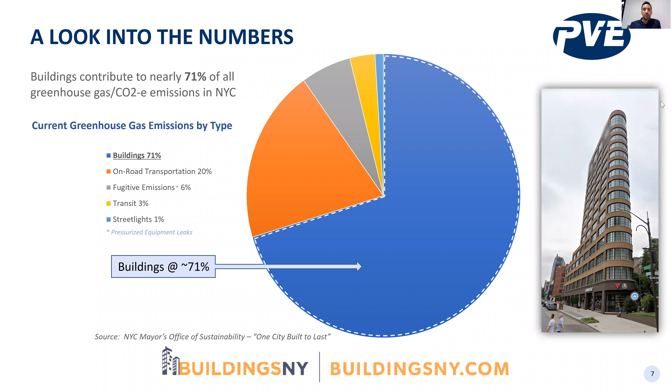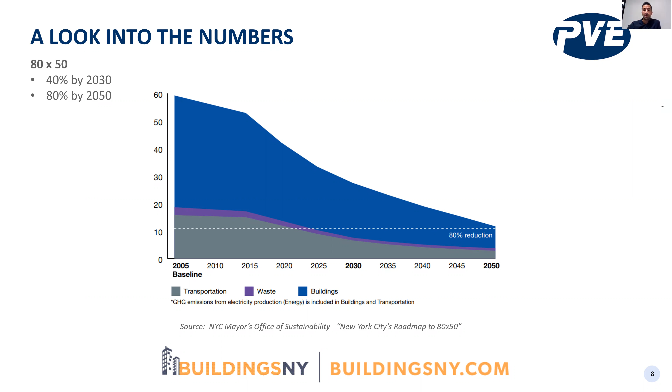And what does that really look like from now, 2020 until 2050? So really, the reduction comes from a 2005 baseline study that New York City carried out on its buildings, and then used that to look towards the future and say, this is the target we need to meet. So again, it's requiring the whole collective average of New York City to reduce its emissions across all sectors by 40% by 2030,

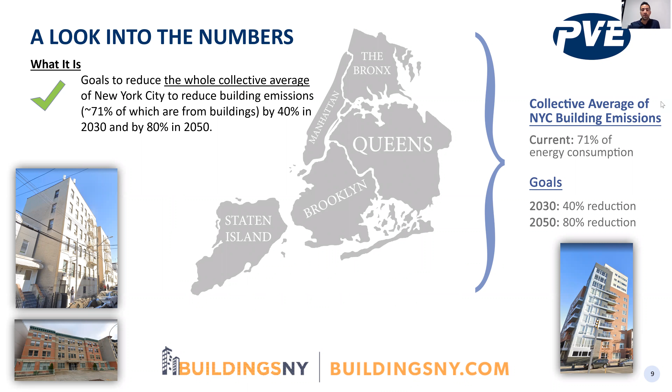80% by 2050. What the local law isn't: it does not require each and every building to reduce by the same amount. It doesn't require every building to reduce 40% by 2030 and 80% by 2050. The idea is that certain buildings that are really good performers don't have to take such drastic measures as those that are bad performers. So really, the law is going to be felt by the 25% or so buildings that are the worst performers out of the bunch.

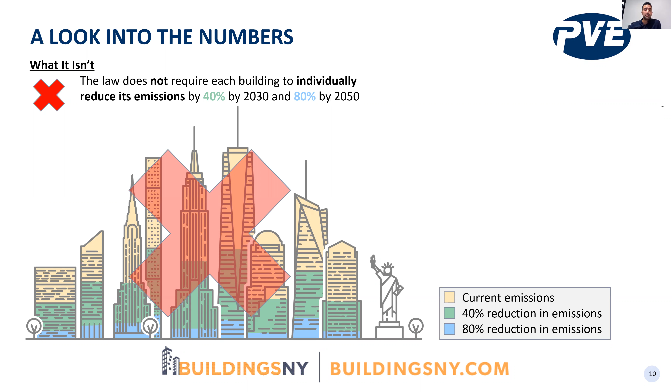And then as the limits get stricter and stricter, when 2030 hits, 2035 hits, then more of the buildings will come into the fold and thus be required to reduce their emissions. So what does that mean? I mean, there's several different types of buildings. Energy Star Portfolio Manager recognizes several dozens of different types of building sectors. But what does Local Law 97 recognize?

So it gets as granular right now as 15 different space types. And you're looking at them right here. They're assembly, business as an accessory to healthcare facilities, education, factory, high hazards, 4 types of institutions, mercantile, 2 types of residentials, storage, and then utility/miscellaneous, which can go into several different categories. For those of you who are familiar with energy benchmarking using Energy Star Portfolio Manager, again, as mentioned before, that has several dozen types of categories.

And something I'll get into later in this presentation is that the rules around which Local Law 97 will be enforced have not been identified and formulated yet. It's going to be another few years until RCNY rules are out there that really dictate the way with which Local Law 97 is implemented, the format of everything, the process of everything, but the spirit of Local Law 97 is in its language right now.

So one of those rules that has yet to be developed is, how does Energy Star, with its several more categories, translate into these 15 categories? So that has yet still to be determined, but with some just general logic, you can look at one use and look at another. So, you can talk with your benchmarker or other energy or building consultants to help you identify which use is more suitable for your building.

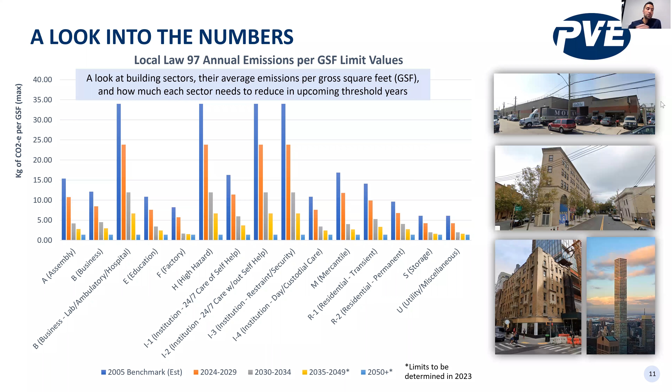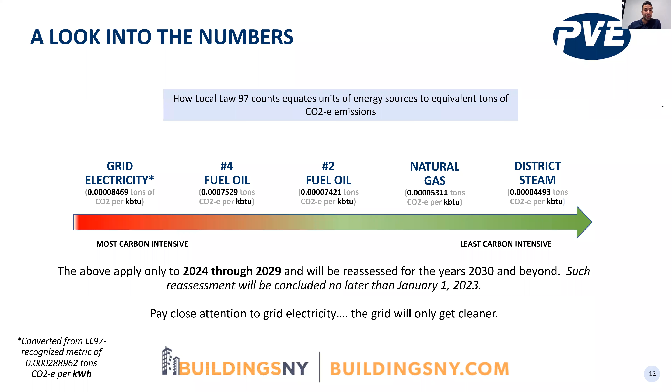And to look at it even more granularly, how are GHGs, or greenhouse gases, calculated? It's according to certain sources. So right now, Local Law 97 identifies 5 main utility sources: grid electricity, number 4 fuel oil, number 2 fuel oil, natural gas, and district steam. So at the moment, they only have coefficients, if you will, that multiply a unit of each one of these utilities and sources to an equivalent ton of CO2.

And right now, as it stands, grid electricity is the most carbon intensive, with district steam being the least carbon intensive. And most of these line up with the coefficients identified by EPA, though these coefficients are more representative of the cleanliness of the infrastructure and the systems that distribute these fuels, and of the plants and the origins where these fuels are produced. So right now, 2024 through 2029 attribute these values to it.

So even though grid electricity is the most carbon intensive at the moment, pay really close attention to this, because power plants around Zone J and New York City and New York State are going to get progressively greener. The electric grid is going to be progressively cleaner in general. So we're going to see a lot of substantial decreases in these coefficients in years to come, potentially for grid electricity to slide over to the right.

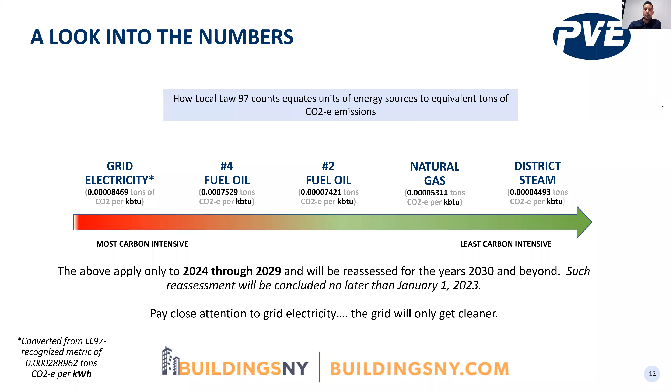So the metric that Local Law 97 recognizes are tons of CO2, and the limits that it attributes to certain building types are on a square foot basis. So for the sake of saving yourselves a bunch of zeros and decimal points, we're just converting in this bar graph tons to kilograms. A metric ton is the unit of measurement used to quantify CO2 emissions from buildings. 1 metric ton equals approximately 2,200 pounds or 1,000 kilograms. So we'll just do one easy 1 to 1,000.

And then carbon dioxide equivalent, or CO2e, is the number of metric tons of CO2 with the same global warming potential as 1 metric ton of an equivalent greenhouse gas. And then what you see here is Local Law 97's expectation for residential buildings and their properties to be at. So if you're a building that's 100,000 square feet, you need to multiply that by 6.75 to get your annual limit of how many kilograms of CO2 you're allowed to emit. So 6.75 times 100,000, 675,000 kilograms per year.

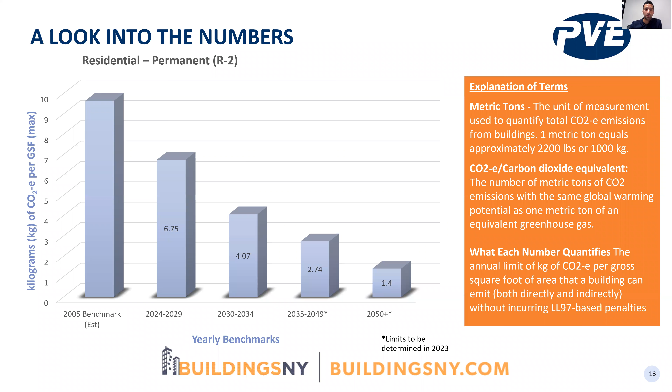So, let's see. Those should be elsewhere, pardon me. So you'll be seeing those bar graphs later in the slides.

So let's do an example here, just a very simple basic calculation. Let's assume that this is a simple building, purely residential, one use type, and that its gross square feet is about 130,000 square feet. And just to note, the square footage used for this law is that recognized by the Department of Finance of New York City. So with 130,000 square feet of purely multifamily residential, that being R2, let's assume that the latest benchmarked greenhouse gas emissions for this building was 573.4 tons of CO2e.

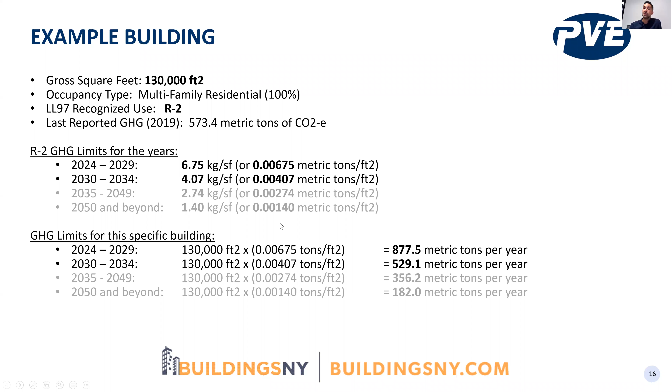So now the values that I showed you in the earlier bar graph, such as 6.75 kilograms, can be converted to metric tons. So for the sake of matching up with values that the law recognizes, let's use these values over here. Then you multiply these coefficients times the square footage down here, and you'll get how many tons of CO2 your building is allowed to emit. Again, these ones are grayed out because those limits have yet to be defined, but we've estimated them for the time being.

Then you take the actual tons that your building last reported, let's assume in 2019, and you take the difference between that and the respective allowable limits for these years, and then you'll see the delta between what your building emitted and what it's allowed to emit. Now keep in mind, we're only basing this off of the latest data available to us, that being what a building emitted in 2019.

When we get to these years, what they're going to care about is that year and nothing else. They're not going to take the limits in 2027 and apply that to what your building emitted in 2019. They're going to care about what's the limit in this year and what you emitted last year. They want to see proof, actual data of what you do in real time in that year.

So in this example, in the first range of years, 2024 to 2029, this building is well under the limit. Therefore, there's no penalty. It complies with Local Law 97. However, as we get to stricter years, this and many other buildings out there are going to see themselves really close to this limit or way over it. So in this case, it's 44.3 tons over the limit.

And when you account the penalty that Local Law 97 says, 44.3 tons times the penalty of, get this, $268 per ton over the limit, then you will be subject to penalties of five digits, $11,872 every year. And then as the limits get even stricter, your fines are going to be even more.

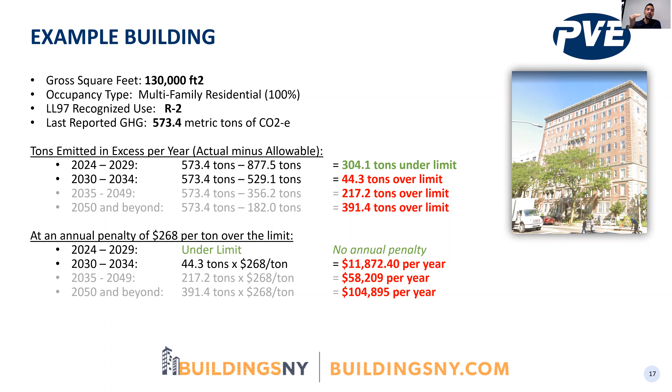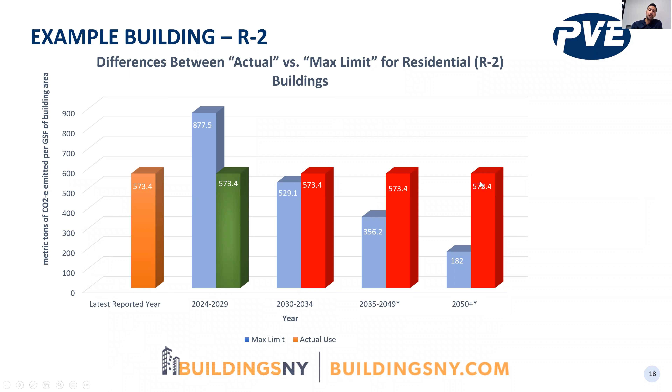So you account this for several years in a row, and then for another 5 years later, your penalty will only get stricter. You've got a long pathway of money that you're going to have to fork over later if you don't invest now in capital improvements to make sure that your emissions are lower now. So this is sort of a graphical representation of that. Green when you're below the limit, red when you're above the limit. So that delta is what you're going to be paying for in penalties. And just a graphical representation of the annual penalty that you would pay in that example.

So that was a rundown of simple calculations for a building that is assumed to comply, no special criteria, no special exemptions, but obviously this law goes beyond just simple basic calculations. That's why we're here to present this to you, because there are pathways to determine whether your building actually complies, is exempt from reducing its emissions, or whether the law applies to your building whatsoever. So let's go through that. These following pages will help you determine the answers to those questions and guide you through the next steps.

So there's going to be a few terms that I'll throw around here and definitions I'd like to relay. For those of you who aren't familiar with what benchmarking is, it's an activity that has been stipulated by Local Law 84 and 133 to annually report energy, water, and greenhouse gases that a building is responsible for consuming and emitting over the course of the calendar year. These are usually handled by a combination of building ownership and professional engineers who submit reports to memorialize to the City of New York how much water it consumes, how much energy it consumes, its square footage, and then this data is all publicly available on New York City's open data website. Penalty assessments, and that's what I just did with that sample building earlier.

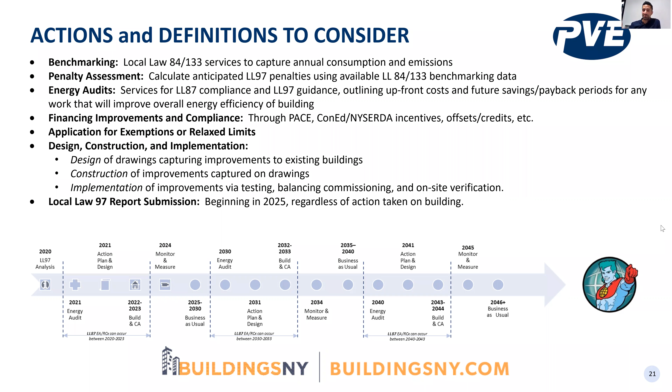So these are just several of many other things that constitute a long-term action plan when it comes to seeing your building's pathway towards Local Law 97 from now until 2050. And your building will progressively become leaner, stronger, and much more energy efficient as it channels its inner Captain Planet or Admiral Atmosphere, whatever you want to call them.

So I understand this content has been quite verbose, as is the law itself, but we put together a decision flow diagram that helps make a bit more sense of Local Law 97 and how you go through this and figure out, does my building need to comply? Do I even need to care about this law? Or can I go through alternate compliance methods in order to comply?

So let's go to the beginning. First question is, how many buildings are on the tax lot? Okay, let's assume that it's just one for now. Next, is your building over 25,000 gross square feet? Let's say no. That's easy. You don't have to comply.

And we don't know exactly if buildings have to submit annual reports saying, I'm a small building, I therefore don't need to comply. There's a good chance, the way that Local Law 84 and Local Law 87 rules are written right now, they usually upload a spreadsheet every year saying these are the buildings that need to comply. So the city has done a bit of homework to say, we know which buildings are exempt. So if you don't see yourself on this list, don't worry about it.

But again, there are still rules that have yet to be developed where we'll have to figure out how this is recognized. But in any case, let's assume that the building is over 25,000 gross square feet. Okay, so is this building that is of the appropriate size a covered building per the Local Law 97 definition? This is a very important facet of the law.

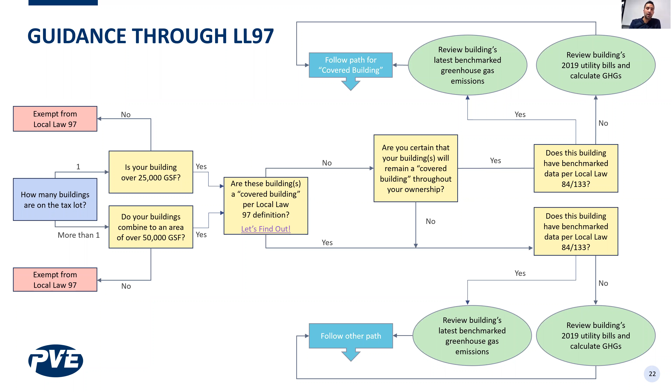Essentially, a covered building, as it's defined in this law, is a building that is required to comply by reducing its emissions below the respective limits. However, if your building is not a covered building, you don't have to reduce your emissions, but you still have to comply. You don't necessarily have to take drastic measures to lower your emissions, but you are still required to perform routine maintenance and prescriptive commissioning measures on your building systems and report such activity to the New York City Department of Buildings. So we're going to cover those definitions next.

So right now, the law as it's written recognizes 7 different types of buildings as non-covered buildings. Those are an industrial facility primarily for electric power or steam generation; real property of not more than 3 stories of semi-attached or attached dwellings, basically small residential properties; any city buildings, though they are being held to different standards for energy reduction; and housing developments or buildings on land owned by NYCHA.

For residential buildings, a rent-regulated accommodation is not considered a covered building. But an important piece of legislation to keep an eye on is 1947. Right now, Local Law 97 recognizes a building that has 1 unit rent regulated as the whole building being rent regulated. So even if a building has 20 units or 200 units, if only 1 unit is rent regulated, the whole building is defined as rent regulated in the eyes of this law. However, this bill could increase that requirement from 1 unit to 35% of all units in the building.

This bill had a hearing a few weeks ago, so we're keeping a close eye on it, as that will certainly shift the landscape of which buildings need to comply, which need to reduce their emissions, and which need to take prescriptive measures. The 6th definition is any place exclusively for worship. And for tax experts out there, if your building is pursuant to Business Corporation Law or Article 11, your building's not considered covered.

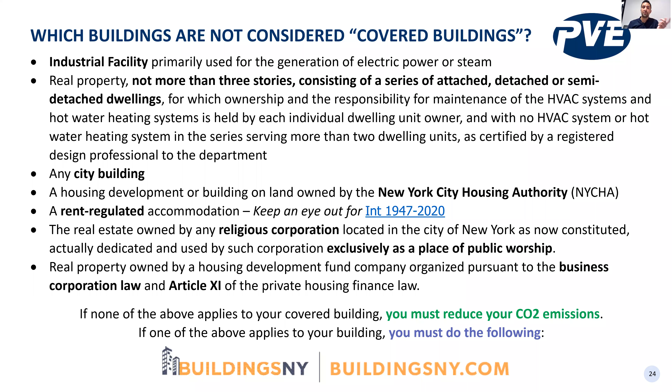So of those 7, if none apply to your building and your building meets the square footage criteria, then you must reduce your CO2 emissions. But if even one of those applies, then you qualify for an alternative pathway. And there are 2 things you can do.

You can choose to go the regular way. That is, if your building already has lower CO2 emissions, you figured, okay, well, if I already am a good performer, why not just demonstrate that to the city, regardless of my status? So I'm good. Very little, if any, effort done.

However, the other thing you can do is, if you find that your building does have CO2 emissions above the annual limit, then you don't have to reduce your emissions, but you can engage a retro-commissioning agent to perform these 13 prescriptive pieces of work, which mostly deal with the standard routine maintenance that would result from Local Law 87, not retro-commissioning. But it's just looking at standard features of lighting controls, lighting systems, sealing leaky parts of the building and the piping systems, just basically going into your building with a doctor and just tightening up its energy usage.

So right now, for any building that meets any of those previous 7 definitions, you need to do these activities by the end of 2024 to be accepted for this. So you have 4 years to do this right now. The law currently doesn't say whether this pathway will apply for future years, but again, rules have still yet to be established for that.

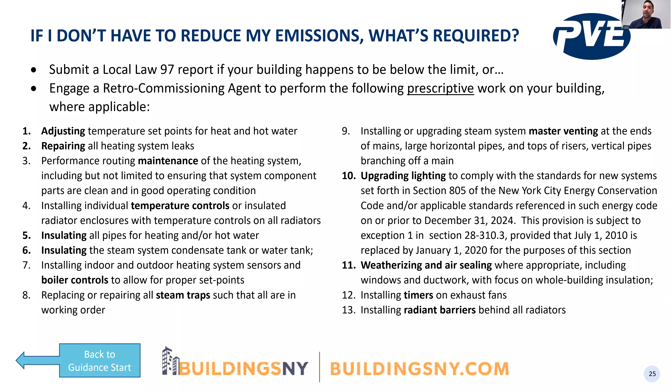So going back here, this was essentially what I described to you, this stage over here. If your building was not a covered building, if it did meet the emissions limits, you can continue to just submit a report annually to New York City demonstrating compliance. But if the building was over the limit, then you can perform that prescriptive retro-commissioning and submit to New York City by 2024.

Now, for those buildings that don't meet any of those exceptions, we follow the same questions, but in the cases where the building's emissions exceed the limit, the steps and the long-term planning get a lot more involved, a lot more complex, depending specifically on how poor of a performer you are. So let's look at an example where a building is right now emitting more CO2 than the first upcoming years of 2024. So question, does your building comply with Local Law 97 emissions limits for the years 2024 to 2029? No. Okay. Does your building exceed that limit by more than 40% in the year 2018? Basically saying, is your building a particularly bad performer?

If you're a facility that has operations that are 24/7, super high density, critical to human health and safety, what you must do is submit an improvement plan to the city by July 1st of next year. That improvement plan should incorporate what plant improvements, upgrades and replacements you're going to be doing over the next 10 years. A good way to get that plan in place is to do an energy audit before that. So if you get that application to New York City by July 1st, the city will allow you to simply reduce your building's current emissions by 30% by 2024 and 50% by 2029.

And then if you're a hospital or healthcare facility, you don't necessarily have to submit a plan, but you just need to submit an application to allow your building to reduce its current energy usage and emissions by 15% by 2024 and 30% by 2029. So that essentially looks like this if you go back and forth from here. Right now, the way the limits are spelled out, it's putting together objective targets that are specific to the baseline that was carried out in 2018.

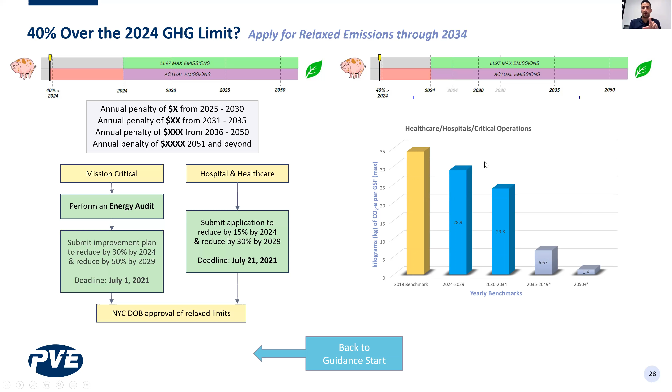But this relaxed limit only wants you to reduce your building's specific emissions by 15% or 30%. So that's in the case for certain buildings that are allowed to get a bit of forgiveness.

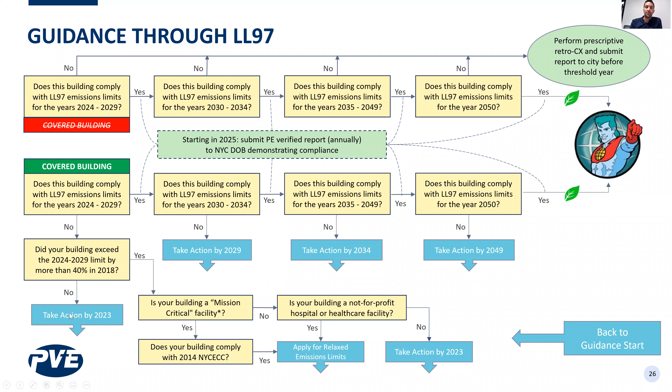But in the cases where a building does not meet that criteria, then it's recommended for buildings to take action with a lot more involved. So what does that look like? This isn't necessarily specific to any building, but this is kind of like an example that could be tweaked and modified to suit a lot of different buildings.

So first thing to do is, once you know where your building lies, is, okay, let me actually get into the building and do an energy audit. Let me do some inspections and surveys. If you can somehow line that up with your Local Law 87 requirements, you can kill two birds with one stone by complying with Local Law 87 10-year energy audits, and then putting yourself in the position to have a menu of items to improve your energy performance and your emissions.

So from there, you can create an action plan from the energy audit report, including financing for these improvements. And then once you have a whole list of items, engage your building owners and property managers to really gauge what's their appetite for short-term, mid-term, and long-term improvements. What sort of budgets do they have? What financing options are available? What sort of incentives are available?

And then from there, make decisions about what we can do now versus holding off on later, and then design, build, and implement that. And then when the year 2024 comes around, that's when you start reporting annually to the city. And then if you need to revisit that same action plan again, sometime by 2030 or 2034, it's more or less the same action. So it's a multi-tiered or phased approach towards a much greener building towards 2050.

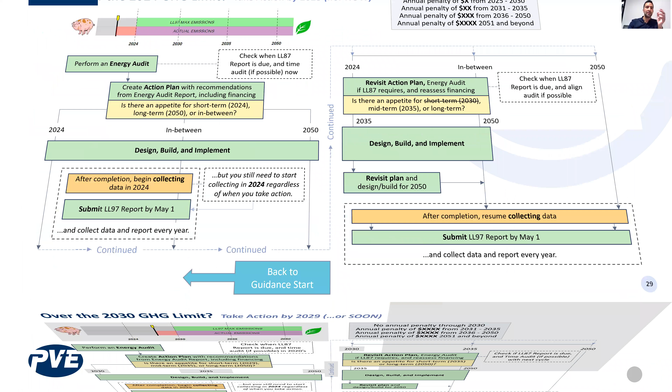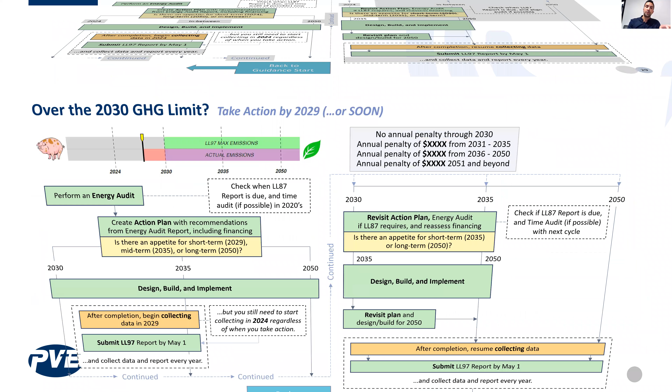And I'm not going to go through each one of these now, but there's a lot of detail here. But essentially, if you're over a certain limit, there is an absolute max time that you want to make sure your action's been taken and your improvements have been done. So if you find yourself over the limit for 2024, you want to make sure you've taken action and completed your work by 2023. Else you'll be subject to penalties. If you're over the limit in 2030, you want to take action by 2029. I think you get the picture.

So I mentioned penalties already to some degree, but just to recap what those look like. They're very steep fines, and building owners will be fined $268 per metric ton that their carbon footprint exceeds specified limits annually. So, for a million square foot building, if you're emitting 100 tons over the limit, actually, never mind, that's a different limit. The square footage really comes into play when you're late. So that's something you don't want to do.

So your failure to file a report on time is arguably the steepest of them all, especially for bigger buildings. For every month that you're late, your building will be subject to a fine of 50 cents per square foot per month. Yeah, I'm shaking in my boots and I don't own a building.

But anyway, lastly, for falsified reports, there's a fine of upwards of $500,000 and/or 30 days of imprisonment for basically the representative of the building.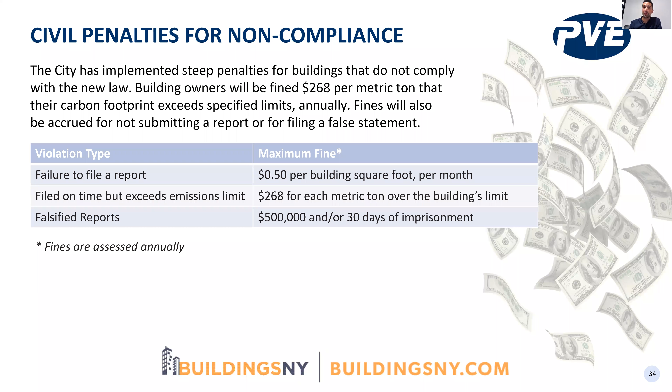So I'm sure there's more Q&A coming. There have been a handful of common questions coming my way over the past few weeks. So what happens if, through all of the available means of design and construction, I'm still unable to basically reduce my carbon emissions? So there's a few pathways you can take.

Let's suppose that a building in a certain year is only, say, 5% away from the limit. You can do things such as purchasing greenhouse gas offsets to lower your building's counted emissions by no more than 10%. You can also purchase renewable energy credits to lower your building's total counted emissions, but to what degree those can actually be used, there are carbon trading studies going on right now that will hopefully determine that percentage. We should hopefully have more information about that next year or potentially by 2023.

What happens if a building can't afford to make all the necessary modifications by the time the deadline hits? So, as mentioned before, New York City is in the process of formalizing programs to assist building owners in complying with the set limits via Local Law 96.

So PACE, which is established in several states across the country, this is essentially New York City establishing a New York City specific PACE program that puts private lenders much more available and within reach of building owners and developers who are looking to finance renewable energy systems and features within buildings. You can have a look on NYCEEC website. You can also ask us for contacts and information of people who can help you look at PACE financing.

So, as mentioned before, there's still a few things that need to be clarified. Local Law 97 won't take effect until 2024, so there's still 3 years or so for the rules to be established. So we talked about what we know, but what have we yet to know? We don't know exactly what the limits are going to be from 2035 to 2049 and 2050 and beyond. We don't exactly know right now how Local Law 97 and the EPA will determine the carbon intensity of energy sources 2030 and beyond. But as mentioned earlier, I think trends will show that the electric grid is going to be on a trend of decreasing its carbon intensity significantly through the cleaning up of the grid throughout New York State.

We don't know exactly how Local Law 97 reports will be formatted. We don't know how many renewable energy credits a building's allowed to use to reduce their penalty. We still have yet to hear from that legislation whether rent-regulated buildings only need 1 unit in the building to be rent-regulated, or whether 35% of units need to be rent-regulated. We still need to wait to see if the prescriptive retro-commissioning pathway for non-covered buildings will need to occur every 5, 10 or 15 years. We still don't know that. And then how often buildings will need to prove that they're not covered. That might also be in the form of an annual report, but we shall see.

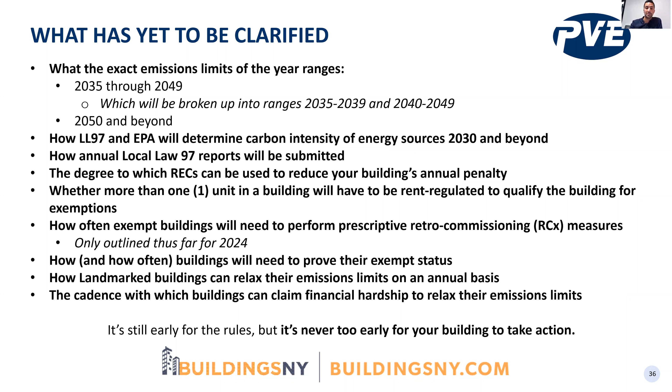So to wrap things up, Local Law 97 goes beyond sustainability and avoiding hefty penalties. For us, this is our responsibility. We at PVE are committed to the cause of reducing global warming and curbing climate change. This commitment goes beyond waving the flag of sustainability and going green, and we hope it goes beyond avoiding penalties for everybody. This commitment is rooted in our inherent responsibility to look after the welfare of the environment and those who inhabit it. We hope that this webinar clarifies how Local Law 97 impacts you, shines a light on pathways towards developing an action plan for your building and your company, helping you maximize your part in New York City's collective responsibility to curb climate change and set a leading example for the country and the world to follow.